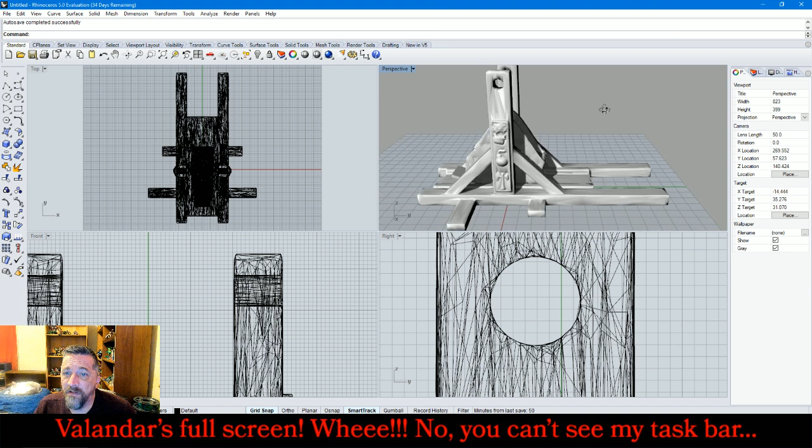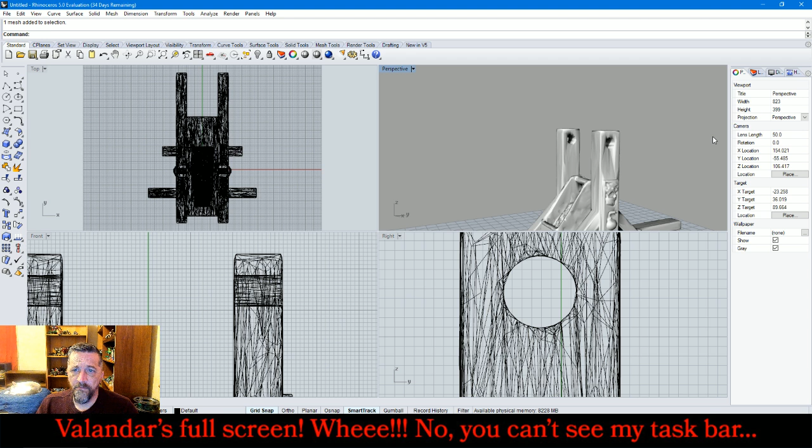And we're going to go ahead, and we're here. As you can see, this is low poly - a lot of the details are either blurry like this, or almost non-existent like the hammer. But we don't care, because what we need is down here - the holes.

We also need to select all and join them together into one, so I can do that, and then we're going to lock it. There, now no matter what I do, I can't click on it - that's intentional.

Now what we're going to do is make ourselves a cylinder that fits inside this hole but leaves behind about a half millimeter to a little bit less gap. That's for tolerances and printing, in case you don't know.

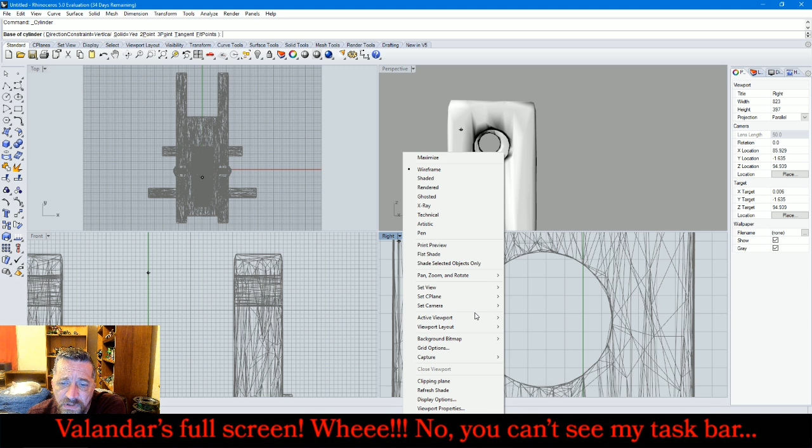Another thing we're going to have to do is change the grid options. I want the snap spacing to be 0.25 millimeters, a quarter millimeter. Then we're going to go ahead and do a cylinder again, and let's get as close to center as possible.

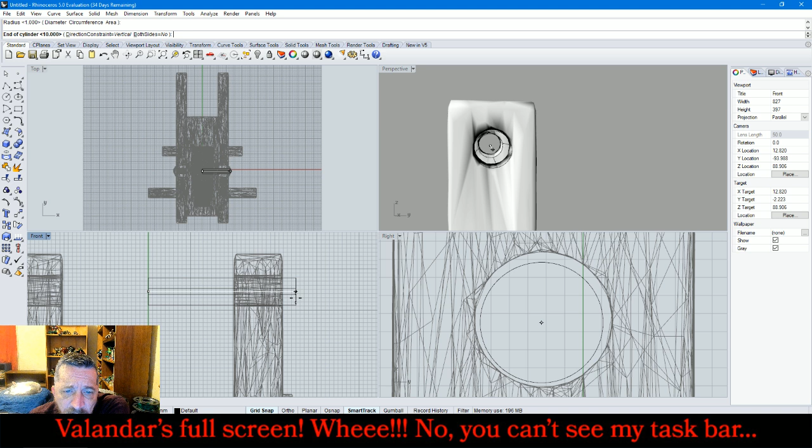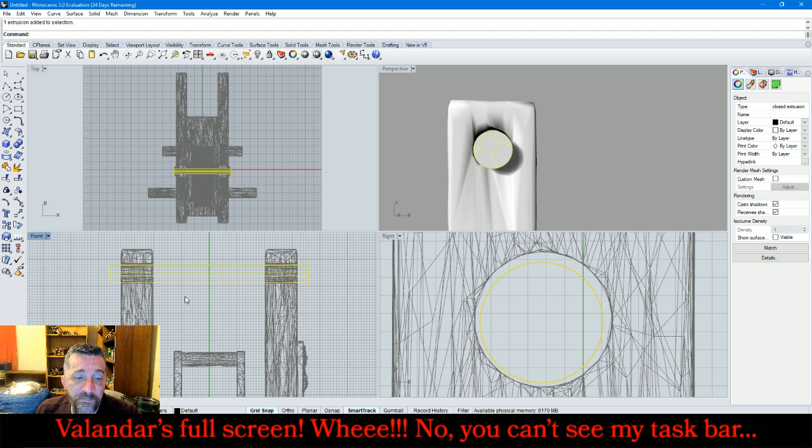Okay, that should do it. That gives us - yeah, we want about there. We're going to bring it out to here, and then from here we're going to scale it double so that it goes across both ways. That is just going to be the entirety of the shaft.

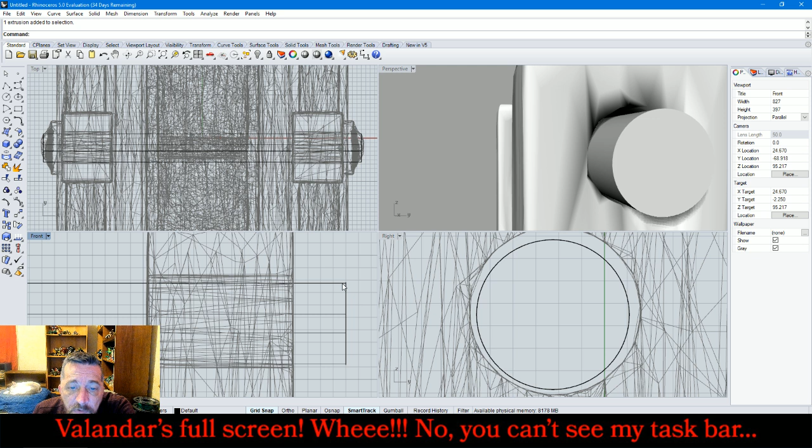We can go ahead and unlock and hide the frame, because that's all we need. Oh wait, no, we can't - because we need to make sure we're putting our cap with enough room to actually turn, which means not 3 pixels, 3 millimeters.

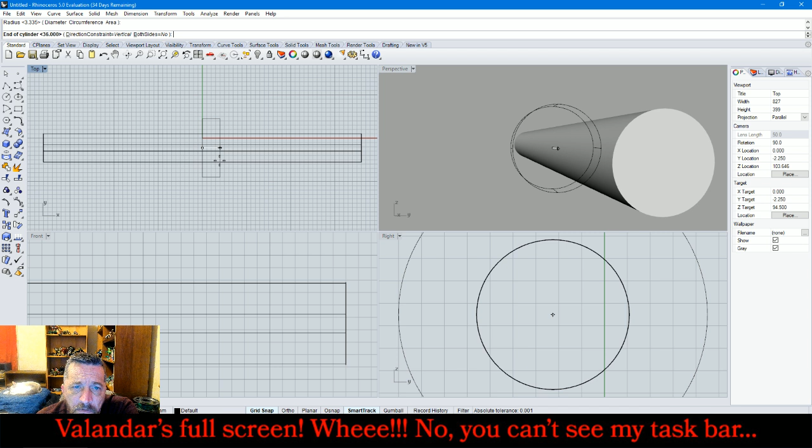Alright, now we're going back to cylinder, and we're going to make this a little bit bigger. We're going to pull it out to about there.

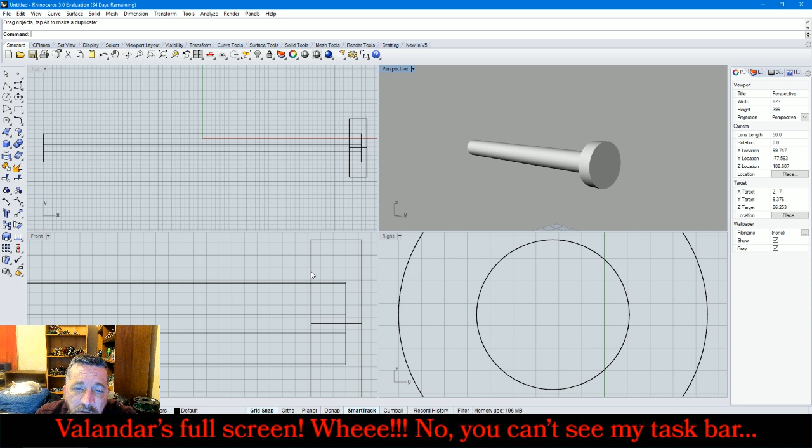Now the next thing we've got to do is bring it in there. We need to make a slightly larger version to subtract from this.

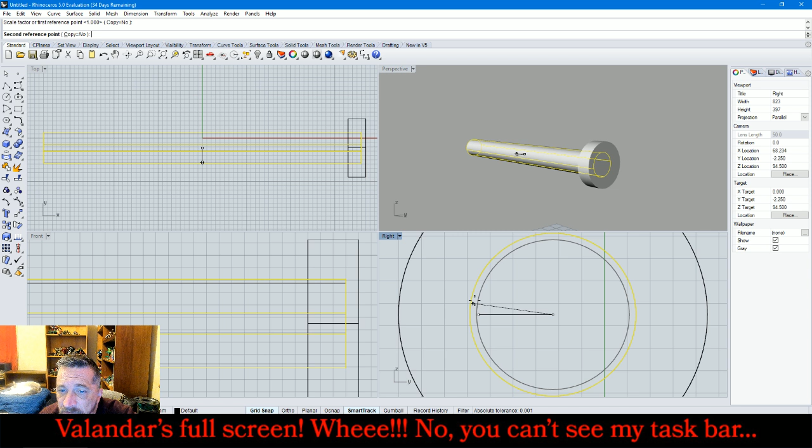We're going to make it a bit larger to give us room for tolerances. About a quarter millimeter should be enough. Then we select this one and Boolean subtract it. What we have now is our cap, with the hole taken out of it.

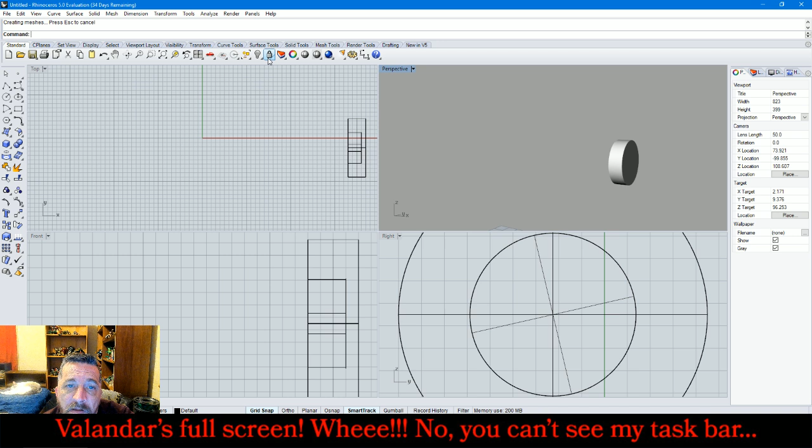We're going to unhide everything. We can see there's room for spin. We're going to hide the frame again, because we've made sure that we can do it. We're going to take this cap and make a mirrored version.

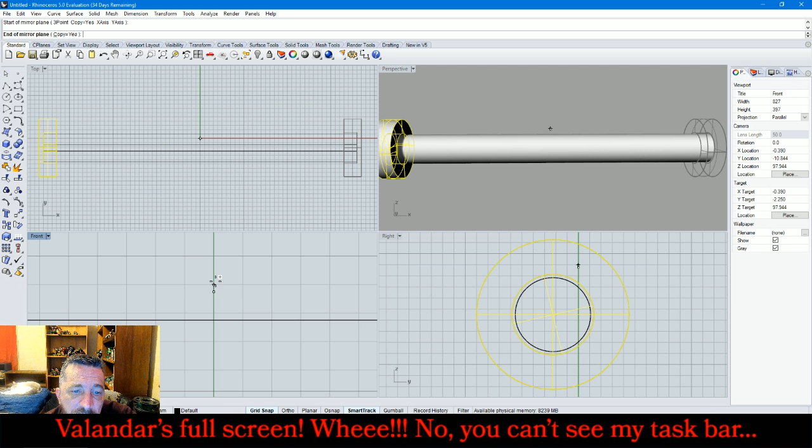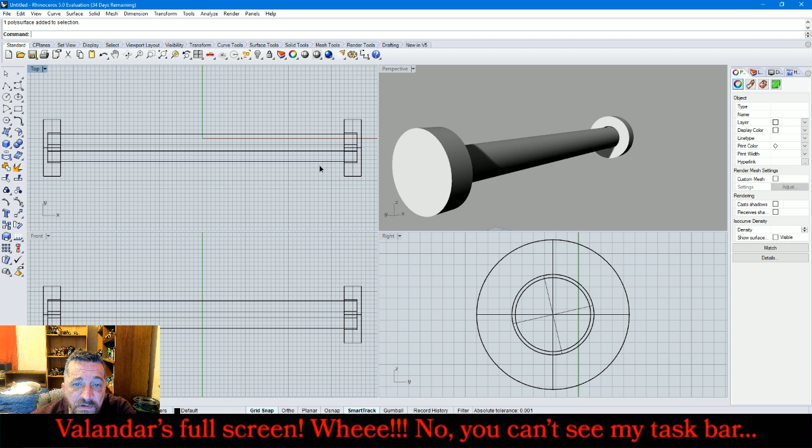Unlike the geometry version from 3D Studio Max, this does not cause it to invert, because Rhino 3D does not create geometry until you render it or tell it to. Right now all of these shapes, these compound surfaces, or in this case an extrusion, are actually pure math. So we're going to select all three of these.

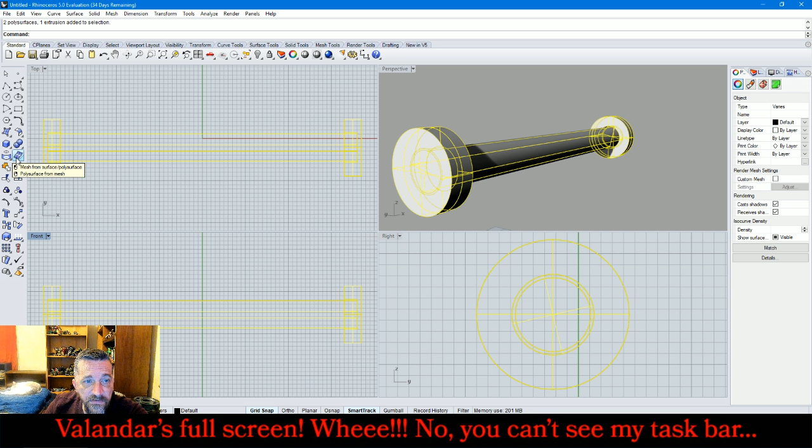We're going to click on this button, and it's going to convert it from surfaces to a mesh. We'll preview it, and we got a pretty decent polygon count. We're going to hit delete.

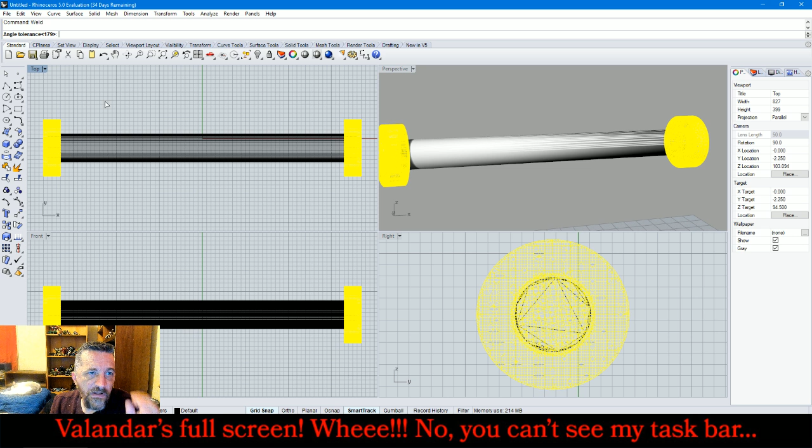Now we're going to set weld angle tolerance to 179, and select these two. Weld - got 179 already, so there we go.

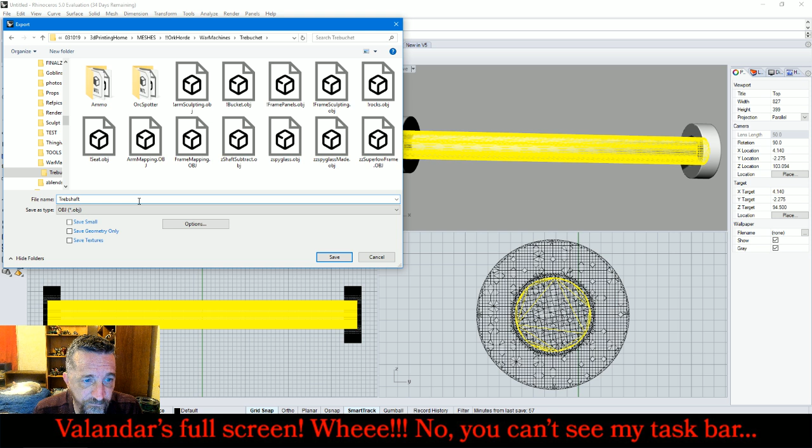Now, the next thing that's going to happen is we're going to export these individually. File, export selected, and it's going into Orc Horde, War Machines, Trebuchet, Wavefront OBJ, Treb Shaft, delete Z, or not Z, but there.

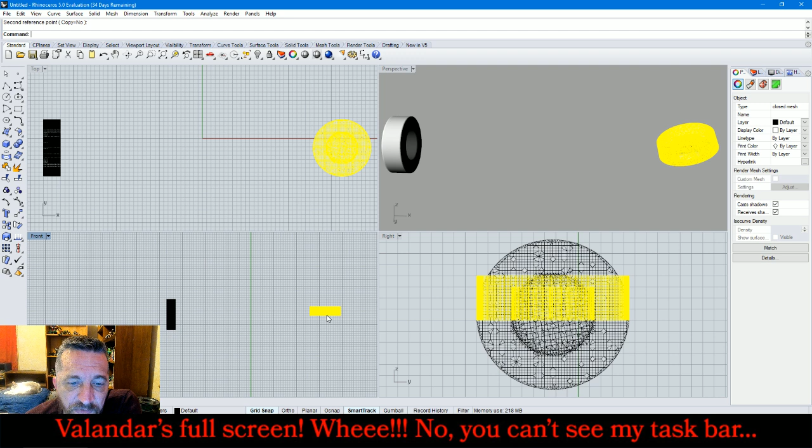Select. Alright, we're going to go ahead and rotate these 90 degrees so we can put them next to each other on the floor. Actually, we can go ahead and just delete one and do what we did before and mirror it, because that way we can also mirror what's on the sides that we end up adding to it.

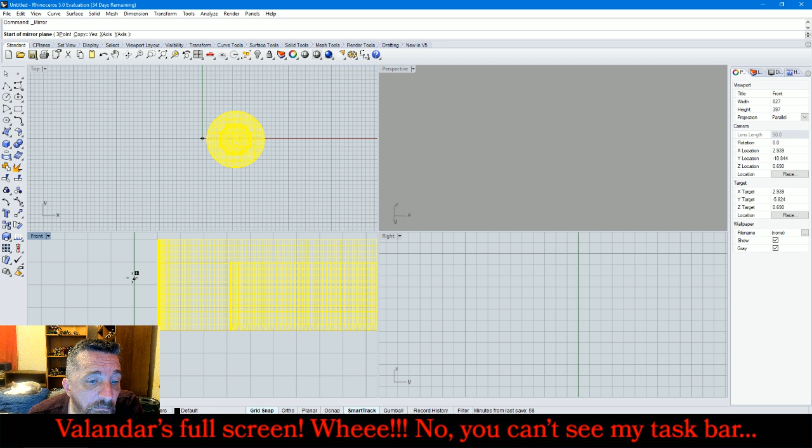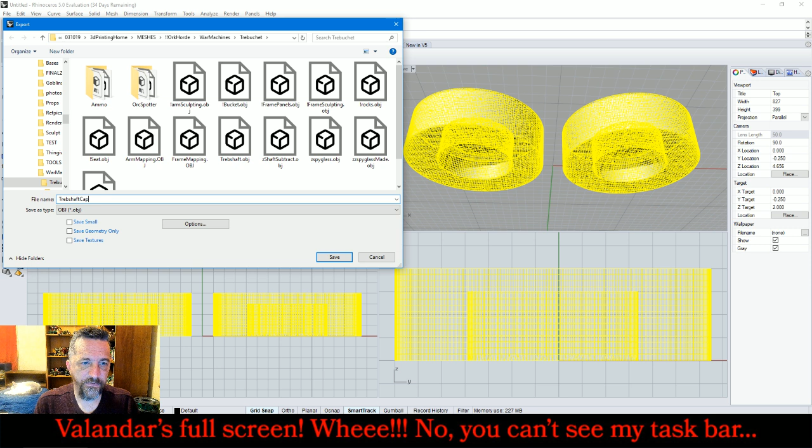And then mirror. We're going to select these. File, export selected - Treb shaft cap. And that's that. We're going to delete them.

We're coming in here to ZBrush. We're going to go ahead and import the super low frame, just because it gives us a nice base to work from. And then we're going to append polymesh, import Treb shaft.

Reason for this is we need to go ahead and dynamesh it, because right now it's got nothing but really long polygons down this shaft, which doesn't work that well. So we're going to dynamesh it at 256 resolution, and that'll not only - there we go - it also kind of smooths out the end caps a little.

Now we're going to hide the frame out, and we're going to use the rake tool to give it more of a bark texture, like it's an actual log.

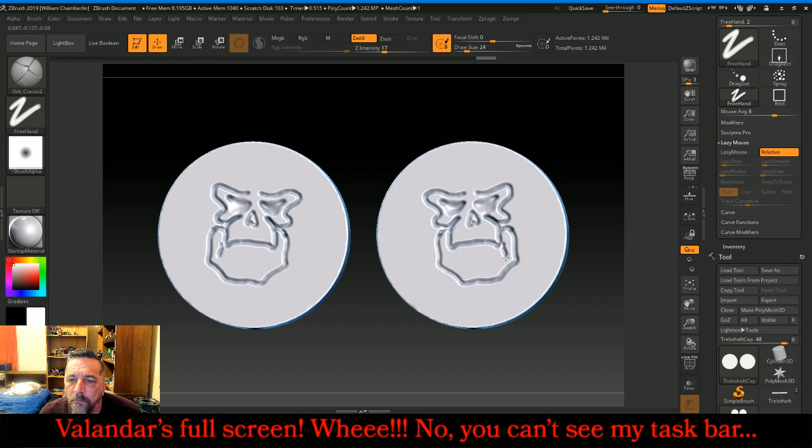Okay. Now, okay. And now, just from here.

Skulls. Now we're going to use the inflate tool. We're going to, actually we need to make this a little bit bigger, a little bit more intense.

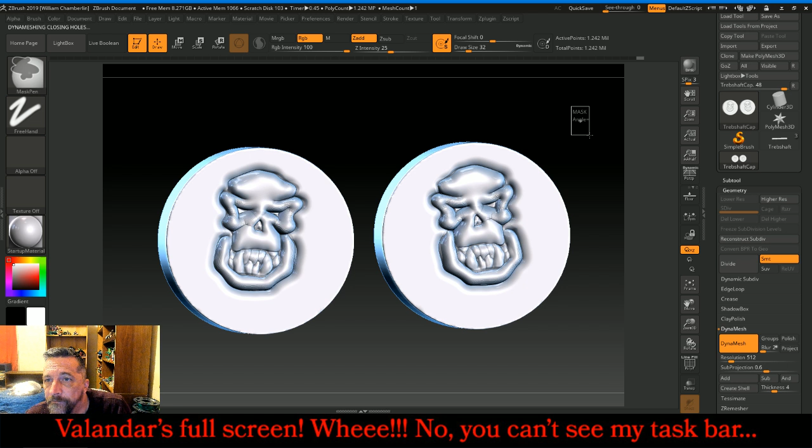We're going to Dynamesh it again. Subdivide it. And then we're going to draw on a bone with the cracks brush. A cartoony, like piratey bone.

That's one advantage to orcs. You can get away with kind of crappy cartoony style decos because they're crude. They're not going through their culture's renaissance. They're just like, I'm gonna slap some paint on it and call it good.

Okay, now we're going to go back to the slash tool. We're gonna make sure we've got... we're also going to make sure that we have the tusks emphasized here.

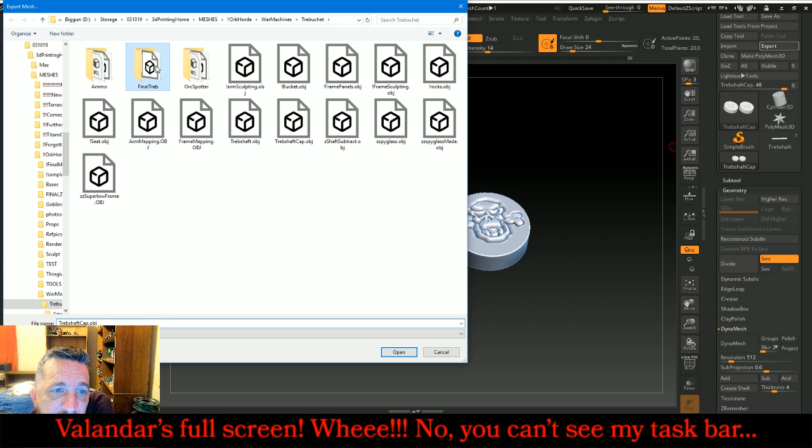Okay. Now we're going to export this final treb. Trebuchet articulated shaft, caps.

We're now going to load tool, the Trebuchet. Bing, there we go. The reason we're doing this is we're going to actually go ahead and save and make these the final geometry that they're going to be, except for the bottom shaft. I'll explain in a second.

So for that, we're going to trash it. We're going to hide everything except for that. And now, this is currently 1.2 million polys.

It's a bit much, so I'm going to decimate it to 250,000. The reason for this is I'm going to be exporting it into Rhino. And I'm basically going to be making a peg and hole for the bit on the bottom here.

What you do is print the arm, print that little piece, print the bucket, hook the little piece around the shaft in the bucket, and glue it into the arm. And then you've got a nice swinging bucket.

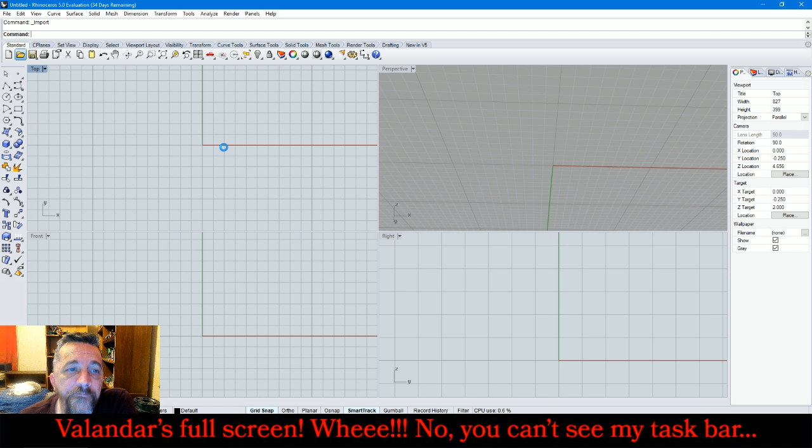Okay, now what we're going to do for this, we're going to zoom in here. I'm going to draw a rectangle and bring it up as close to the bottom as I can. Okay.

Now, that is going to be the base from which the base, that's going to be used for subtracting and non-subtraction elements. Now, making a cylinder, make it over here.

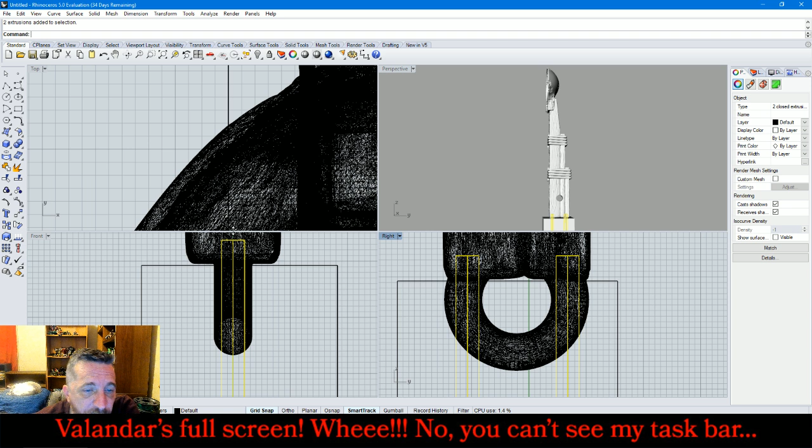Okay, that's going to be the pegs for... actually it's going to be the peg holes for the ring on the bottom. The pegs are going to be slightly smaller.

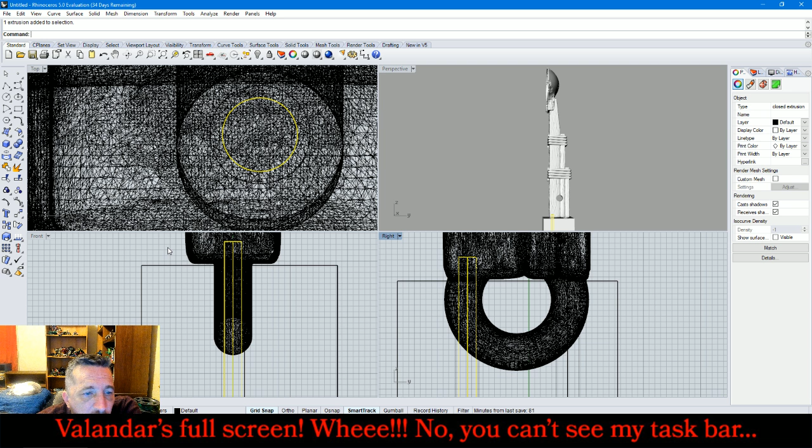So we go to cylinder, and one, two. Bring them up the same height, or a little bit less than the same height. We're going to do it this way, we're going to copy it. Looking at the bottom, a little bit easier.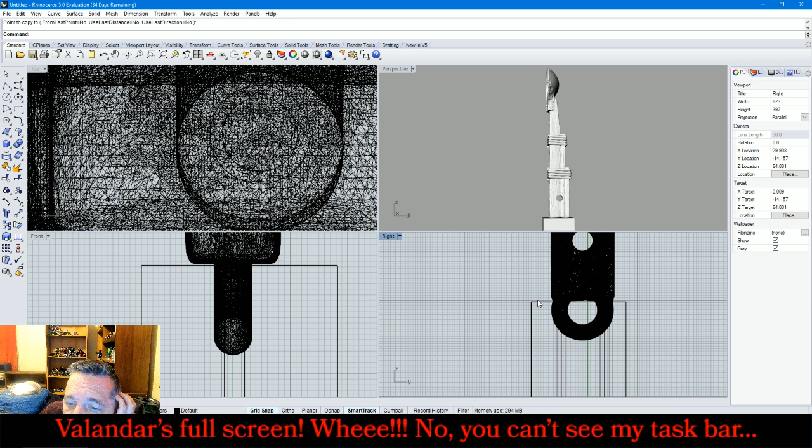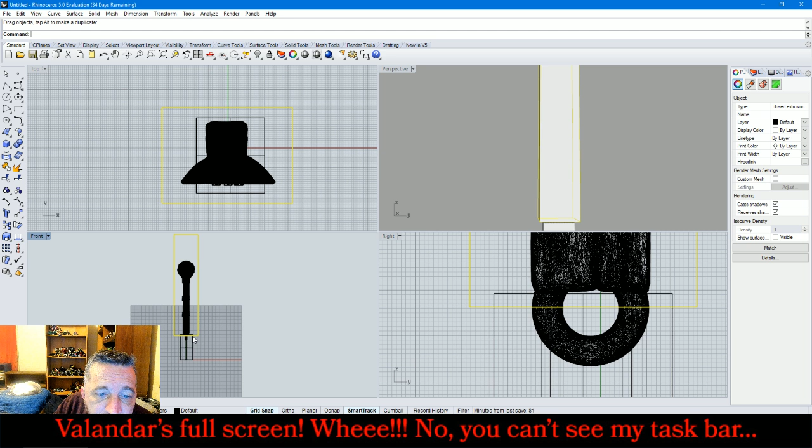We're going to go to here. Now, what we're going to do is Boolean union the smaller ones in the box. Then we're going to make a much bigger box, bring it up, and come up a little bit like that. And then we're going to subtract everything down here.

Oh wait, no. We don't want a Boolean union with the smaller, we want a Boolean union with the bigger. Sorry, my brain just went meep.

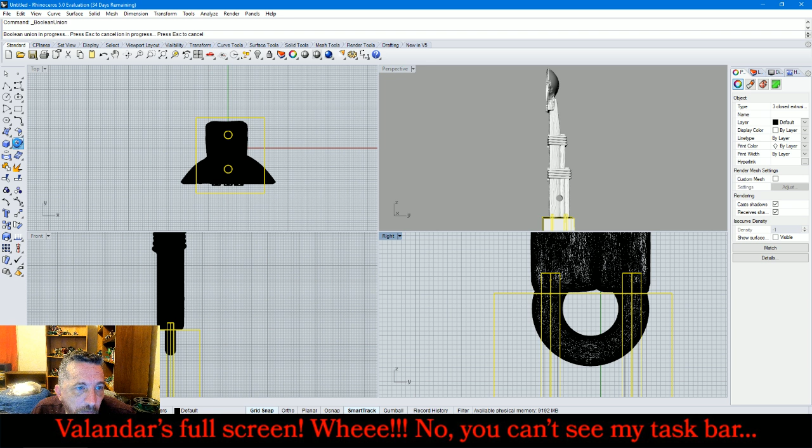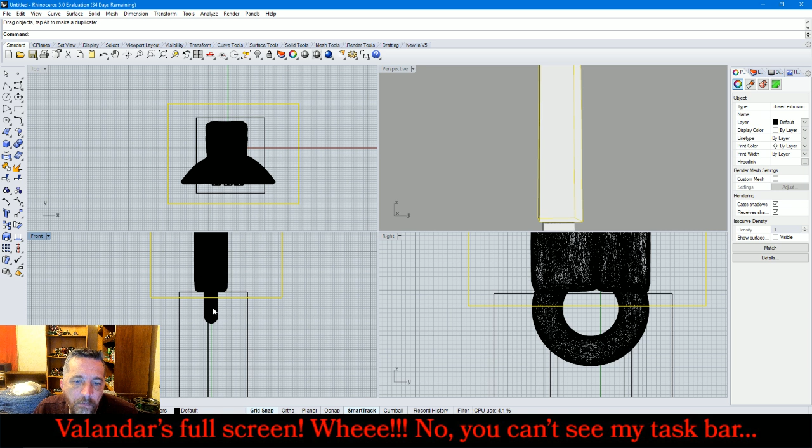Actually, we need to duplicate this. So then we're going to hide that one. Now we're going to make the bigger one. And now we're going to subtract that. Okay.

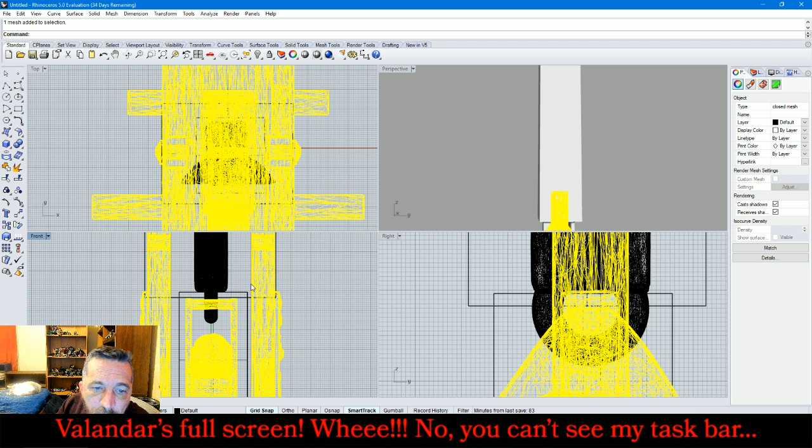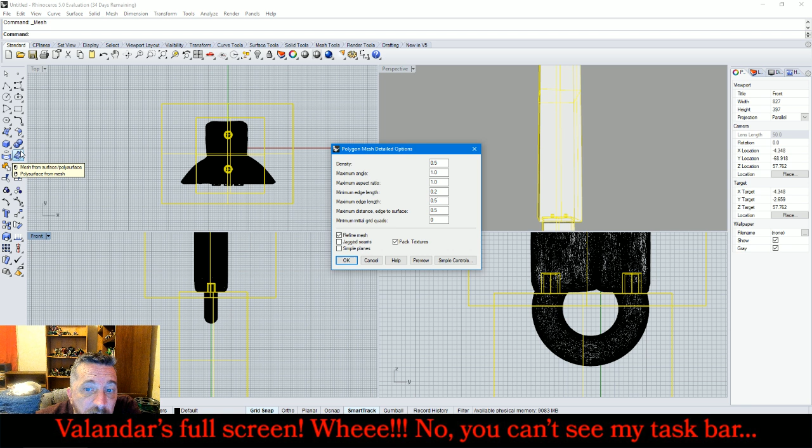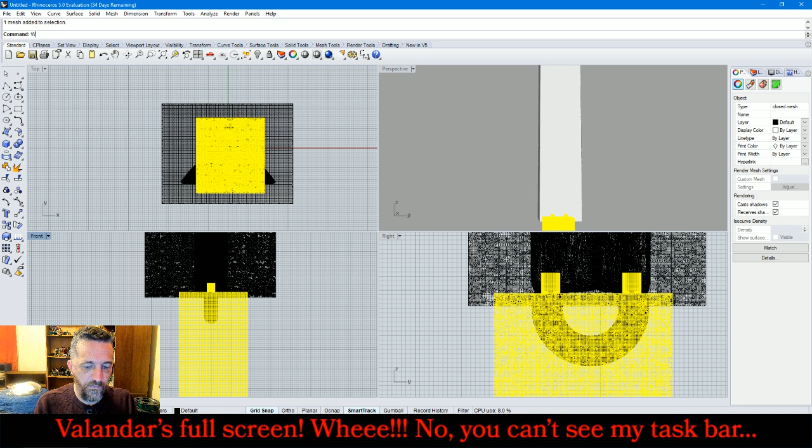What we have is this to make the holes in the arm, and that to make the pegs for everything. So now we're going to select them, make them into meshes, delete those, and then select them one at a time. Weld. Okay. Now this one. Weld. Okay.

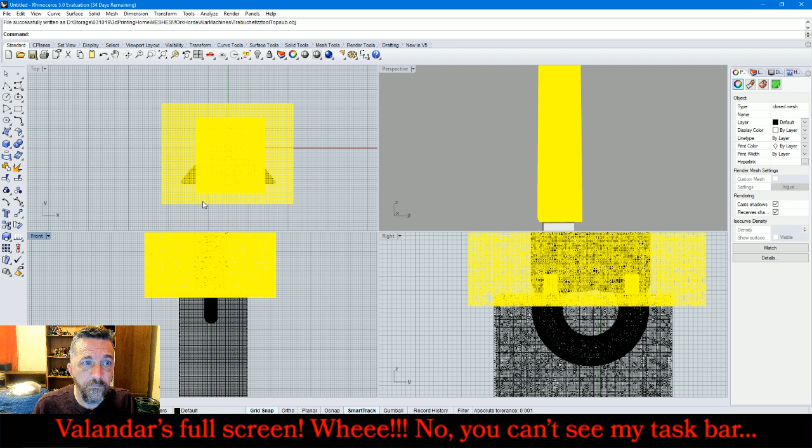Now this, file and save it as geo, ZZ tool top sub. Delete. Save as ZZ tool bottom sub.

Okay, we delete it, and then we delete this. Going back to ZBrush, we go back a step so that we go from 500,000 back to 1.22 million. We're then going to duplicate it, go up to the top one, insert, next one we insert. This one will be tool bottom sub, and this one will be tool top sub.

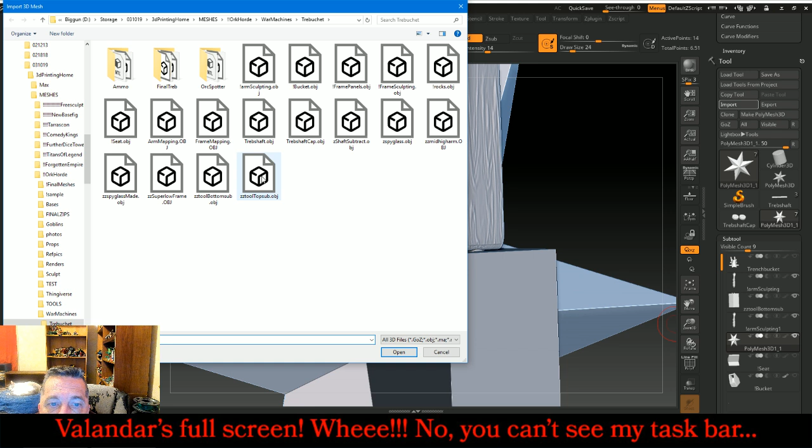Okay, we're going to hide these two for right now. Now, this arm, we need to make sure that it is set up for dynameshing. Then we go to the actual tool, Dynamesh at 768.

Then, with that still lit, we click on that little right there. Group is Dynamesh sub. Now I can merge down. Always okay. And then click that, and we'll end up with our little bottom thingy with pegs. Excuse me, excuse me.

And there we go. That is going to be the bottom for the trebuchet. Now we go back up to the peg subtract. We're going to do the same thing.

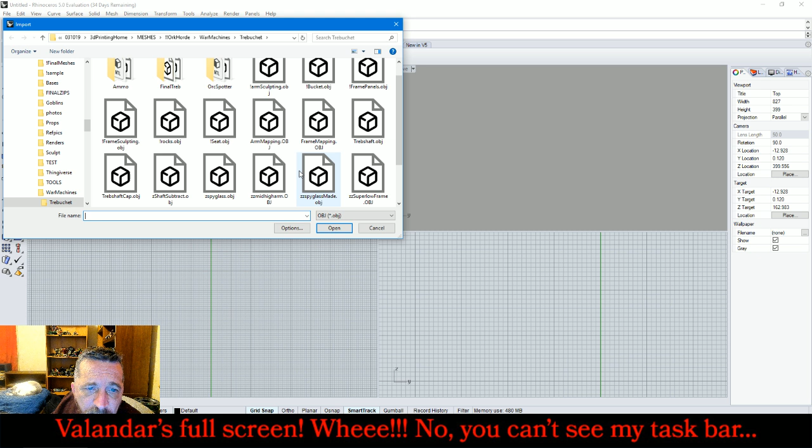Now we need to export these individual parts. And while I'm thinking about it, let's go back to Rhino real quick. We're going to import that super low arm, or mid-high arm. We're going to make sure it would fit on most print beds, because it's starting high and going even higher.

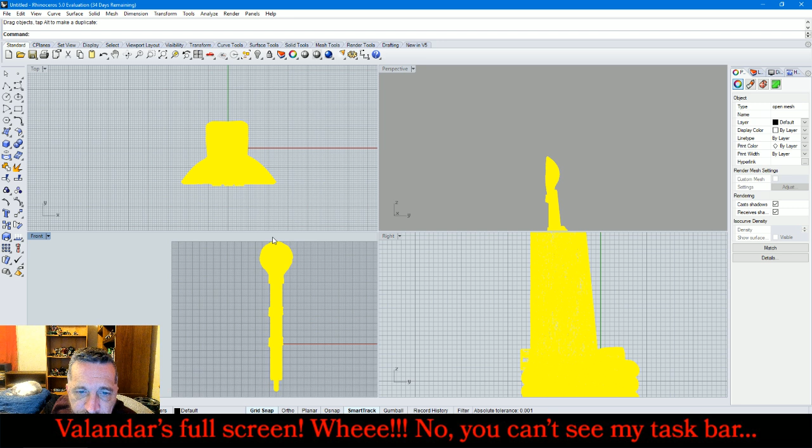Okay, now considering and keeping in mind that each one of these squares is a centimeter. 15 to here. 16, 17, 18, 19, 20, 21, 22. It will fit on an Ender 3 or larger. The majority of people right now have an Ender 3 or larger for terrain type pieces.

So it will fit. That's going to be just under a foot long. The whole thing's going to be like that assembled. Large enough to be impressive on the battlefield, but not so large that it's ridiculous.

Now we're going to delete the shaft because we've already dealt with it. Now the actual frame, we've already gotten it fused together, so now we're just going to go ahead and make it. Let's see how 100,000 triangles works for it.

Now to let you know what we're going to be doing next, after we get these pieces subdivided and saved out as their articulated versions, we're going to go work on making the two posed versions. Then we're going to get to work on finishing our orc, and a couple rocks maybe, if we have time.